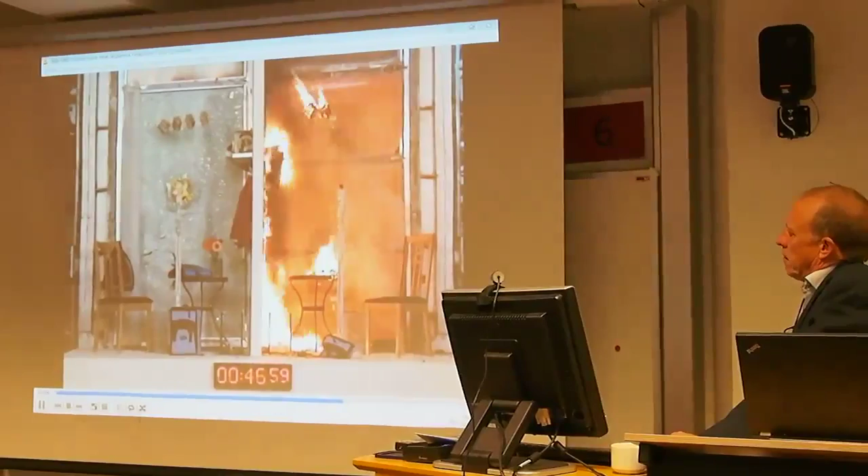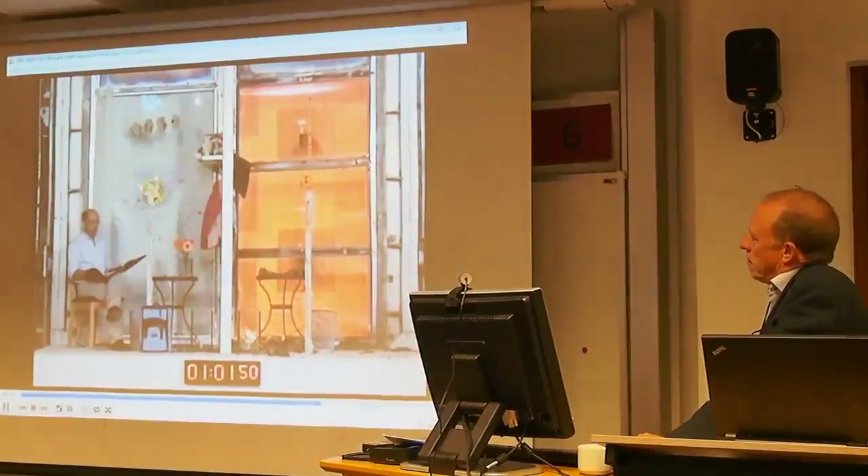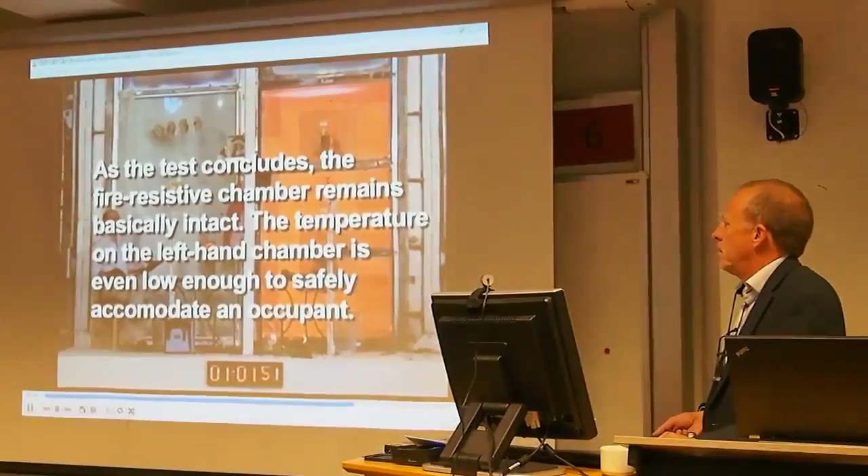As the test concludes, the fire-resistive chamber remains basically intact. The temperature on the left-hand chamber is even low enough to safely accommodate an occupant. Take a look at the various items within the test chamber. The objects on the table are charred. The shelf and its items are completely gone. The wood cribs have burned away.

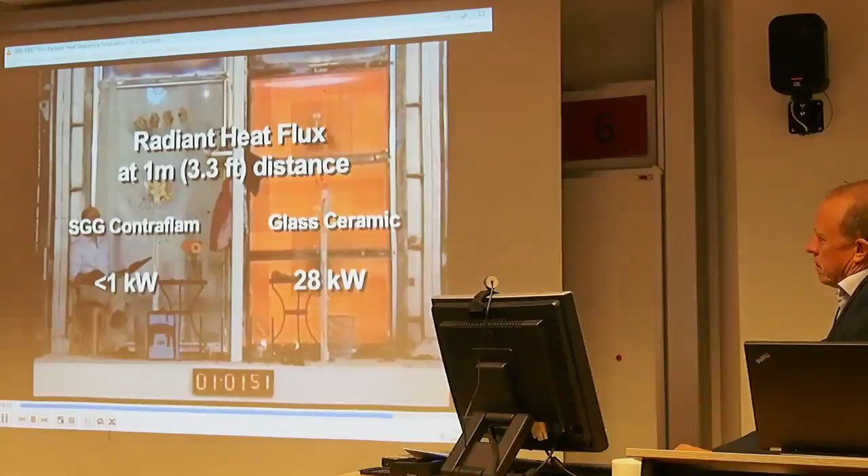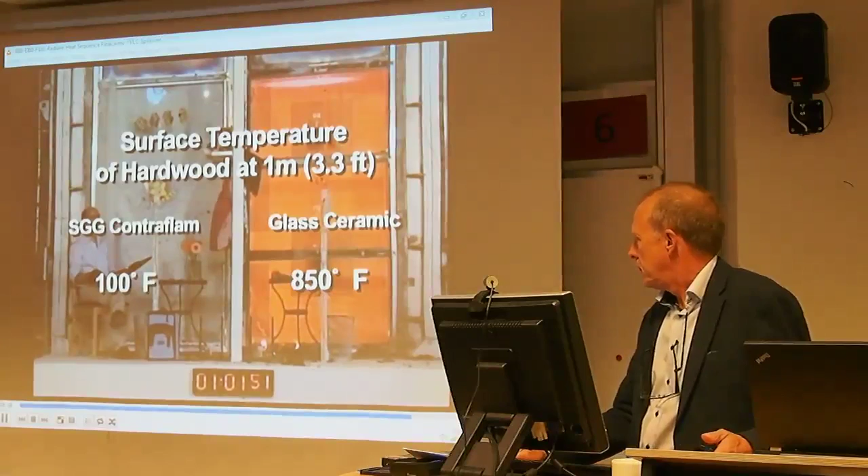Comparison of key measurements. Radiant heat flux at 1 meter or 3.3 feet distance. SGG Contraflam, less than 1 kilowatt. Glass ceramic, 28 kilowatts. Surface temperature of hardwood at 1 meter or 3.3 feet distance. SGG Contraflam side, 100 degrees Fahrenheit. Glass ceramic side, 850 degrees Fahrenheit.

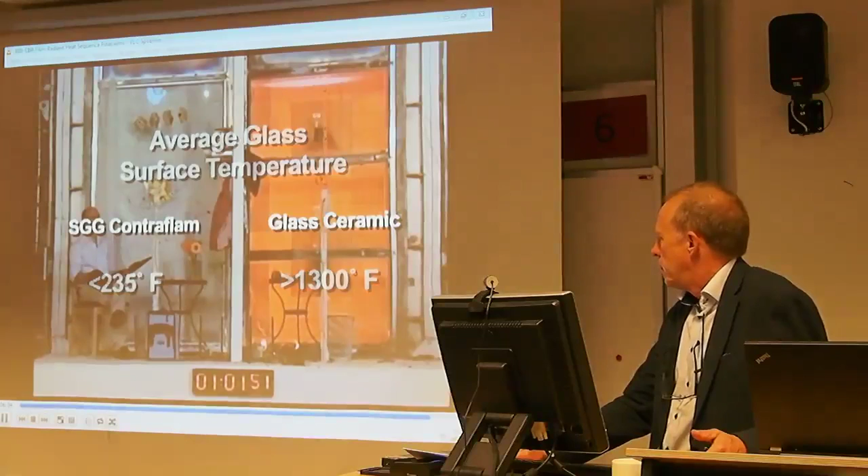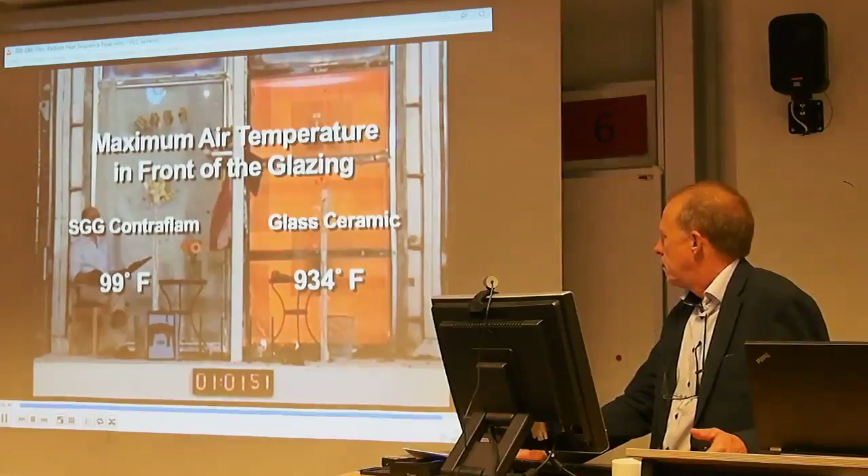Average glass surface temperature, SGG Contraflam side, less than 235 degrees Fahrenheit. Glass ceramic side, more than 1300 degrees Fahrenheit. Maximum air temperature, SGG Contraflam side, 99 degrees Fahrenheit. Glass ceramic side, 934 degrees Fahrenheit.

So when we test, to cover all situations, we normally have one as big as possible and as high as possible, and then one small, as a side panel for a door, for instance, and then what we call an over door solution as well. So you are allowed to be flexible in the different situations, because if the authorities see the report, they say, okay, but here you have a very small dimension, what happens in a fire if we change it? And sometimes we lay it down, which is not very